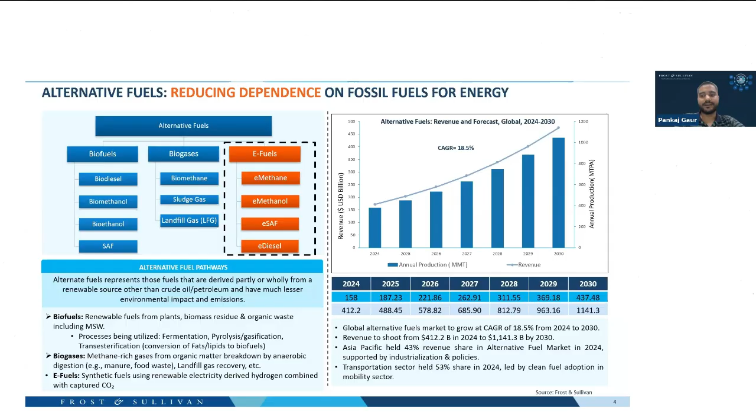If you look at the revenue part as well in billions USD, we are starting from a level of 412 in 2024, and we are crossing 1 trillion by 2030. We are reaching a level of 1.14 trillion by 2030. So you can imagine it's a very big market, and it's going to be even bigger in the next 5 to 7 years as we envision it at Frost & Sullivan.

Now, if you look at what are the typical application areas that are driving this growth, the transportation sector is leading the alternative fuel market growth by the majority. It had 53% market share, primarily driven by mandates for cutting down emissions within the city, outside of the city, and a lot of policy push as well in this domain.

So overall, the pie of alternative fuel is growing, has grown in the past years, and also is expected to grow very exponentially in the next 5 to 7 years as well. So e-fuels can become a really important part in this market going forwards. That is what we expect.

Now, if we talk about e-fuels, what are e-fuels? First of all, we have to define that, right? So e-fuels are basically a combination of renewable hydrogen as well as captured carbon dioxide. Now, renewable hydrogen is typically called green hydrogen. It is made by the electrolysis of water via various pathways that we have: alkaline electrolysis, PEM electrolysis, solid oxide electrolysis, and we also have the emerging domain of membrane-less electrolysis as well.

If that is combined with captured carbon dioxide, either from direct air carbon capture or point source carbon capture, like the carbon that we generate in industries, flue gases, we capture carbon from there, and then we combine these together in accordance with various choices of pathways that we have, we can form e-fuels. So it's a very broad range of fuels that we are talking about here, and it's not just fuels. E-fuels are also used as feedstock for production of final products in various kinds of industries.

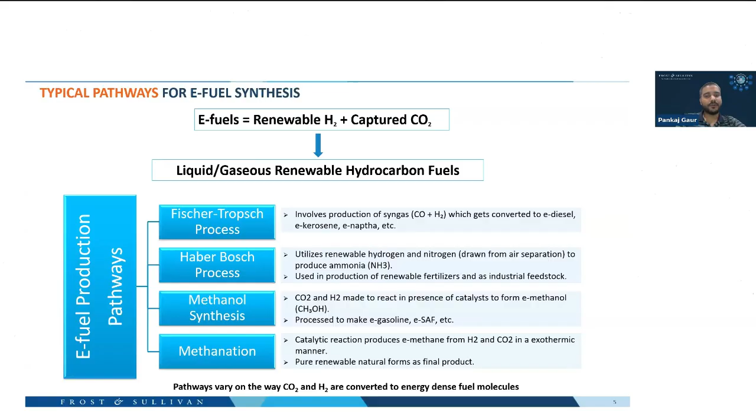So overall, what we are doing is converting captured carbon dioxide and renewable hydrogen into energy-dense fuel molecules by a variety of processing pathways. So next up, we'll have the value chain analysis of e-fuels, how they are formed, what are the various pathways, the nitty-gritties of that, which will be talked about by Rishika.

So before we deep dive, I want to say why we need e-fuels in the first place. As you can see, biofuels gained momentum in the early 2000s, but that started the food versus fuel debate. And they also cannot electrify or access the hard to abate sectors, for which we need e-fuels.

So let's start by walking through how the entire e-fuel value chain works step by step. It begins with renewable electricity, that's the backbone. Solar, wind, or hydro energy generates clean power. This electricity feeds into an electrolyzer, which splits water into hydrogen and oxygen. The hydrogen that we get here is called green hydrogen.

We have other types of hydrogen as well, but mainly green hydrogen is the one that has been created by renewable electricity only, because it is produced without emitting CO2. This green hydrogen then combines with captured carbon dioxide, which we can source either from industrial exhaust gases or from direct air capture. So now we have our two main ingredients, hydrogen and carbon dioxide, and we can synthesize them into different liquid or gaseous fuels using chemical conversion technologies.

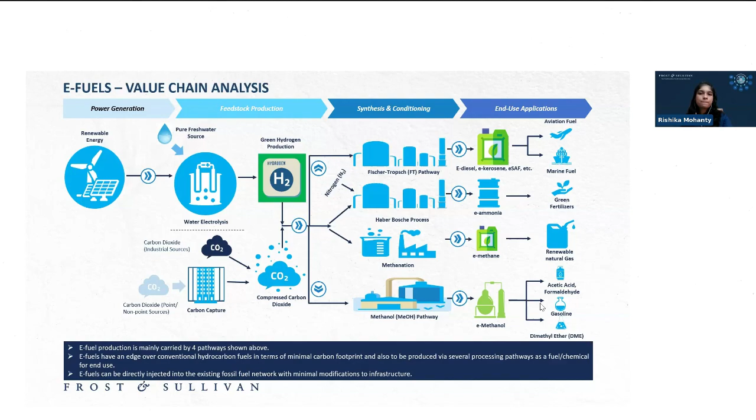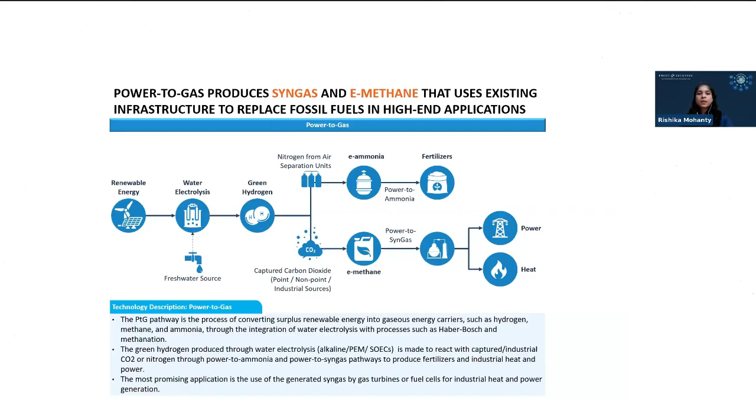So here we separate the power to gas from power to liquid pathways. It's noteworthy that power to gas has a higher overall efficiency than power to liquid. And since it doesn't need further upgrading and scaling up, it is much more capital cost effective as well. The main products of PTL are e-methanol, e-kerosene, e-diesel, synthetic gasoline, or naphtha. These are all drop-in, transportable, and can use existing logistics.

If we talk about power to gas, we have to focus on the ammonia part here, right? Ammonia is the major pathway that we are using currently from power to gas. And then, of course, we also have e-methane as well, which is used as a drop-in replacement for natural gas, right?

Yes, yes. Then after power to gas, yeah, go ahead. Yes. No, go ahead.

After power to gas, we have the power to liquid pathway, which is the second most prominently used pathway for e-fuel production, wherein we are getting a liquid fuel at the end, right? So again, the pathway is the same.

We have the green hydrogen production, we have captured carbon dioxide coming in, and then we have FT or methanol synthesis pathways. So either we form fuels that can be used as marine fuel, jet fuel, or we produce chemicals that are used as feedstock for further processing in various kinds of industries. So we have synthetic crude, we have DME, we have methanol that is produced from the power to chemical pathway. So if you want to expand on this part on power to chemicals, Rishika.

Mostly when we do methanol synthesis, we get power to chemicals, which can then be upgraded to synthetic crude, DME, and methanol, which, apart from the fuel market, can be used as feedstock for plastics. So as you can see, a lot of things are plastic, and it's one of the biggest contributors. So a lot of players like European Energy and Liquid Wind are targeting the e-chemicals market so that they can provide feedstock from e-fuels that can later replace the conventional plastic market.

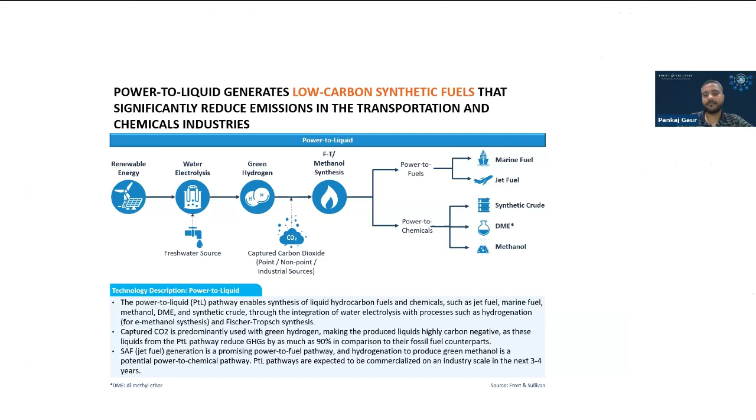So when you say less, it means that e-fuel can also be carbon negative in nature, is it? Yes, but it again depends on the scaling up of CO2 capture technology, which is still nascent in this era. Okay, got it. And also on the equivalent CO2 that we have coming out of the fuel during utilization, right? Yes. Okay, thanks for that, Rishika.

Next up, we have the comparison of the various pathways that we have just discussed on three broad parameters. First is the global warming potential, second, the water demand, that is the water required to produce a unit of e-fuel, and then the total production costs. Now, the highlight is on the cost part here, because if you see in the table, the last row is basically conventional crude oil based fossil fuels. If you look at all the various pathways, e-fuels are typically 1.5 to 5 times higher in cost than their fossil fuel equivalents.

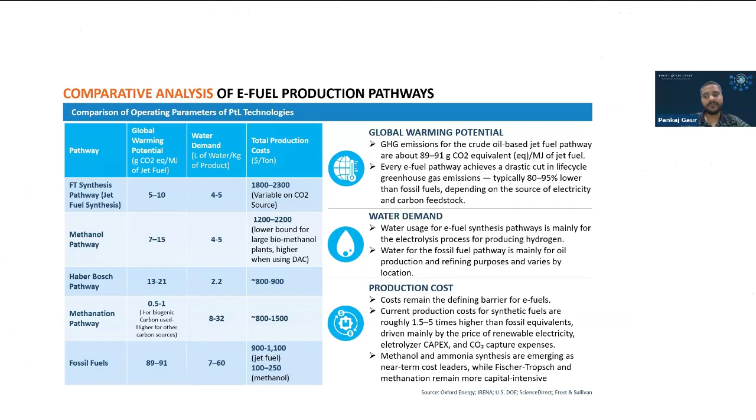And it's majorly associated with how they are being produced, right? If you look at the ingredients required for producing e-fuels, first up, we have the RE cost, renewable electricity cost. Then we have the production of hydrogen from there. So the capex required in an electrolyzer plant, the BOP system that we need there, the cost and the energy required to demineralize the water used in an electrolyzer. These all add up.

And then we also have cost from the captured carbon, because carbon capture is not very viable or economical at scale as of now. It's a very cost intensive activity, because we need separate installations at factories or industries to capture the flue gas carbon, store it, and send it out for processing at e-fuel plants. So that builds up the cost to a level that e-fuels as of now are not economical, or at cost parity with conventional fuels. And that is the major hiccup.

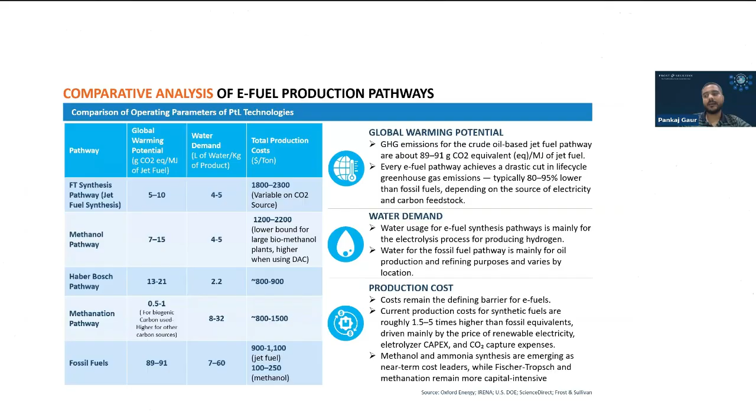Because if you look at the other two parameters, e-fuels are shining very bright. They save a lot of water, and they have much less global warming potential compared to conventional fossil fuels, multiple times so. But the major hiccup, as I said, is the cost part, where e-fuels still need a lot of technical breakthroughs, cost reductions in hydrogen production and carbon capture, and also a lot of policy push at this time in terms of mandates for incentivizing or mandating the uptake of e-fuels by hard to abate sectors, the transport sector, and others.

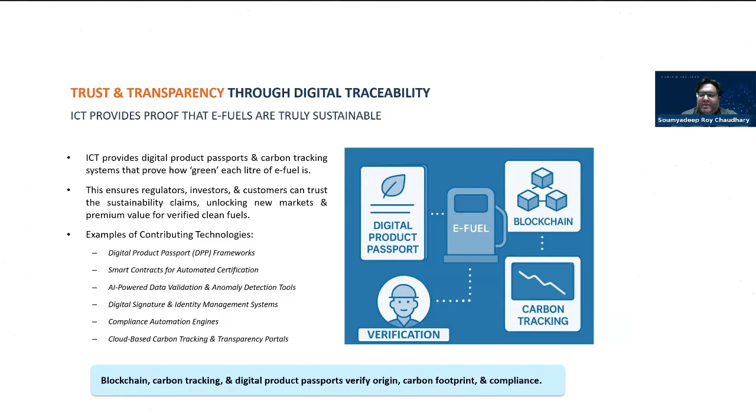Absolutely. There's a lot of work going on in this, and we are going to see more blockchain-based recording or verification in the coming days. Yeah.

Okay, moving on to the next one, which is the final one. I wanted to focus on the integration with the larger energy ecosystem or the market. Modern plants operate in a very complicated web of renewable power sources, carbon dioxide suppliers, logistic networks. So an ICT integration platform can link these dots, these particular functions, in real time, and provide data like electricity prices, carbon dioxide capture schedule, transport system, pipeline.

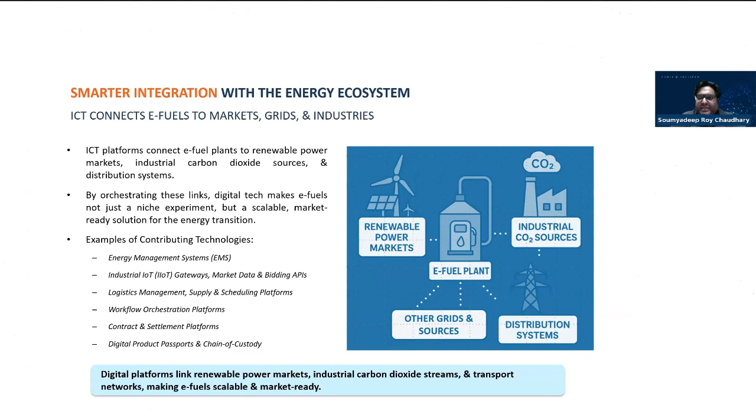So it creates a way to match demand and supply in many ways, in terms of production, supply, and visibility, which can be provided with an ICT dashboard or a portal that unifies multiple sources, and internally it can also show the data. By using shared data models and secure digital links, operators can align production with renewable availability, match the carbon dioxide supply with demand, and coordinate deliveries, reducing delays.

AI-driven scheduling is another way. AI makes it possible for an entire system to run on its own and track when everything is scheduled and when it will be available, and automation makes it possible for contracts, compliance, and supply chain to run more efficiently. So this orchestration ensures smooth production, verified carbon data, faster audits, and of course, reliable delivery.

So it makes it not just a pilot concept for those who are starting, but a market-ready part, ready to go into the entire energy ecosystem, all the way to the energy transition. These are some examples, like energy management systems and logistics management workflows. So this gets you all the way to the market efficiently. And with the previous points about efficient production and trust and traceability, it's a full circle of what it can provide.

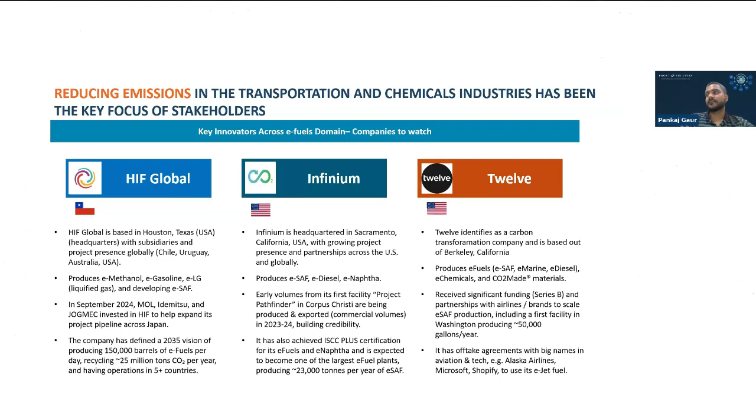Now, all of these companies have a lot of focus on e-SAF. And these are the areas in which we are expecting e-fuels to make the first impact: e-SAF and e-marine fuels, because they can be regulated very closely by governments, and the mandates can also be issued easily. That's what we think. That is the major reason why a lot of companies are focusing first on e-SAF, and then gradually they'll move on to transportation fuels like e-gasoline and e-diesel as well.

So apart from this, we also have these three companies. Rishika, you want to take them up? Yes. So in stakeholders, we also have INERATEC. Apart from eSAF, they are focusing on e-kerosene as well as the e-chemicals market.

So INERATEC is essentially a German modular engineering company that explicitly designs modular power-to-liquid units. In mid-2025, INERATEC inaugurated ERA ONE, their flagship multi-module plant in Frankfurt. And the company describes it as Europe's largest operational PTL plant with an initial capacity of up to 2,500 tons per year of synthetic fuels.

The plant sources biogenic CO2 from nearby biogas waste streams and uses hydrogen byproduct from local chlorine production as the hydrogen feed. This highlights a practical route to early low-carbon feedstock that lowers input costs and improves life cycle accounting. Importantly, INERATEC secured a 70 million euro package from the European Investment Bank. And that basically highlights how the European government is hell-bent on pushing PTL to the brim.

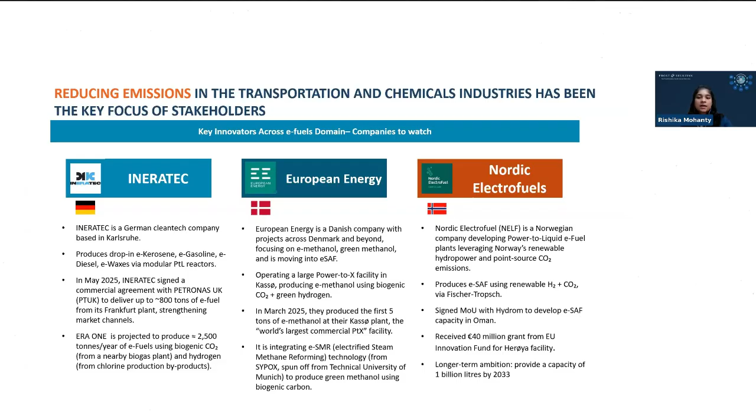Lastly, we have Nordic Electrofuel. Though this is a very small startup European electrofuel company, and has just established a PTL pilot plant, they have a long-term ambition of 1 billion liters by 2033, which is a lot. And I think government believes in them also, because Hydrom from Oman as well as the EU has given them a lot of push in terms of a 40 million euro grant and offtake agreements.

In August, Rolls-Royce and INERATEC entered into a strategic partnership to use e-fuel as backup power for data centers. Prometheus Fuels is commercializing DAC CO2 feedstock for PtX. And as we know, the biggest player of them is HIF Global with the Haru Oni demonstration facility. They have received the ISCC EU certificate and are the largest PtX player in the EU market.

Along with that, we have Twelve. Twelve is essentially a carbon transformation company. They are looking to do everything electrified. They want to do e-chemicals, they want to do eSAF, and recently they have announced a new agreement with Autodesk to procure power-to-liquid SAF certificates in advance to manage price volatility.

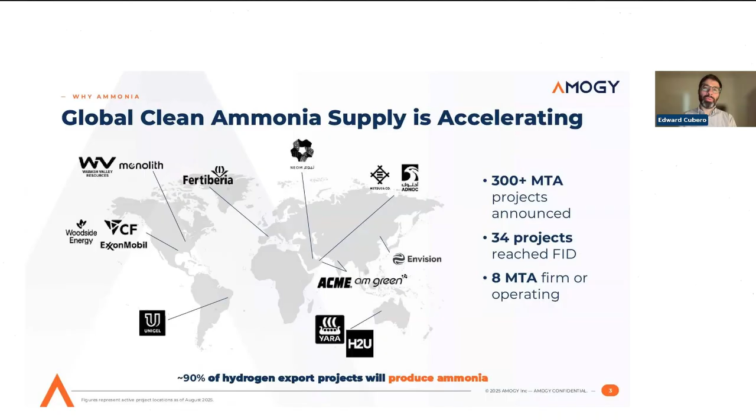And when we think about ammonia, it can be used as a fuel or as a hydrogen carrier. So of the projects that are going to be exporting hydrogen, 90% of those projects will be producing ammonia as the fuel. Next slide, please.

And another aspect of ammonia that really makes it a strong candidate as a future low carbon fuel is that there's already a large infrastructure in place to store and transport ammonia. So ammonia, there are about 200 million tons produced today, and about a quarter of that is the merchant ammonia market. So it gets traded from its production site to other users.

And to enable that trade, there are about 200 ports around the world that have the ability to handle ammonia, load and unload ammonia. In the U.S., we have about 4,000 kilometers of pipelines that can transport ammonia, largely from the Gulf Coast, where it's produced, up to the upper Midwest, where it's used largely in agriculture.

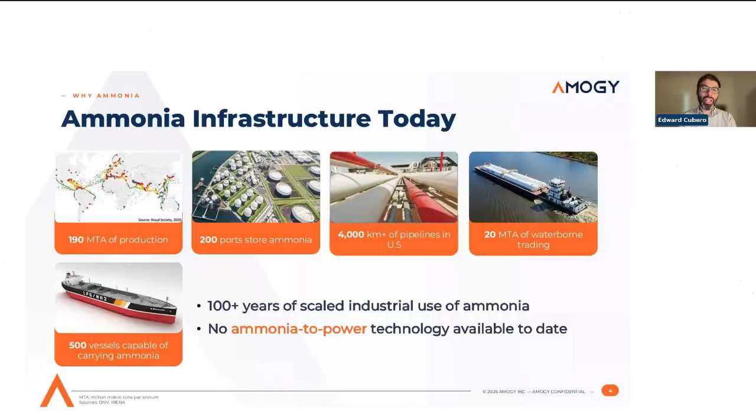And then 20 million tons of ammonia are traded using gas-carrying vessels, so large gas-carrying ships on the ocean, as well as barges in rivers and inland waterways. And if you look at the actual fleet of vessels today, there's about 500 vessels that would be capable of carrying ammonia. So there's a lot of infrastructure that's already in place that can really give ammonia a head start as a future fuel.

So Amogy's technology is a catalyst, and our catalyst can decompose ammonia to hydrogen and nitrogen at lower temperatures than other commercially available catalysts. And this catalyst lies within an ammonia cracking module that we also develop ourselves. And this module provides the heat required to enable the catalyst to break down the ammonia.

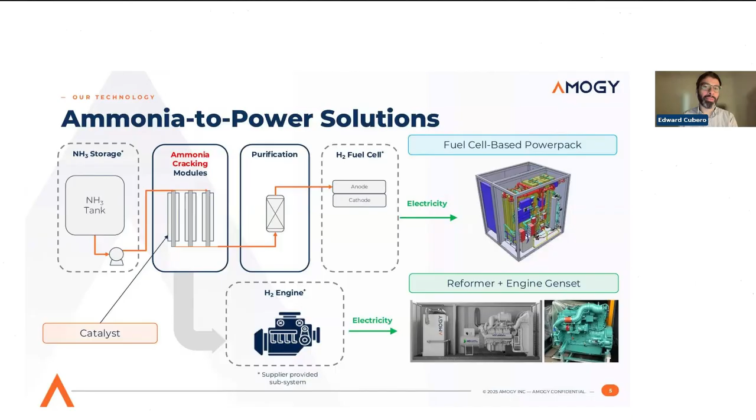To date, we've demonstrated our technology 4 times. The first proof of concept demonstration back in 2021 was a drone, and we then scaled that up in under a year, about 10 months, to a tractor, a John Deere tractor that was retrofitted. Then about 7 months later, we retrofitted a truck, a Class 8 truck, and all these ran on our ammonia to power system coupled with a fuel cell.

And then our most significant demonstration was last September, and we actually sailed a tugboat using ammonia about 2 hours north of our headquarters on the Hudson River in New York. And so now, over the next year or so, we'll be deploying our first commercial pilots and beginning to commercialize the technology.

Small question here on this slide. So you demonstrated the technology starting with a drone, right? And then you moved on from a drone to tractor to truck to tugboat. So the cracking part happens within the vehicle itself, and then the utilization happens via fuel cell? Yeah, exactly. The cracking system is within the vehicle. So we removed the existing engine from the vehicle, and we put an ammonia tank, our cracking system, and the fuel cell.

Okay, so it can be made so small that it can also fit on a drone. Yeah, that's the idea. Because our catalyst is able to crack the ammonia at a lower temperature, we could really reduce the size of the cracking system. So we developed a small modular cracking system.